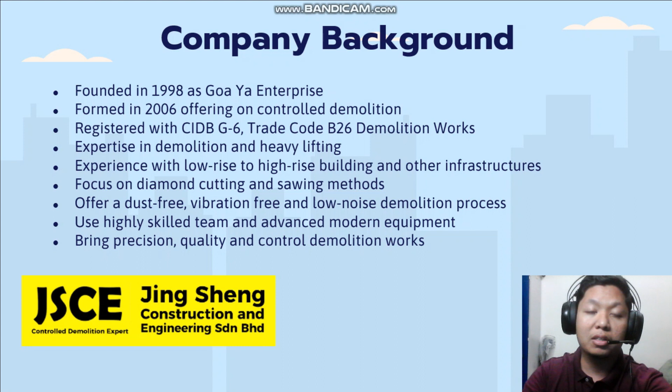Jing Sheng Construction and Engineering is a demolition company and heavy lifting specialist contractor with experience ranging from low rise to high rise, residential to industrial, and building to infrastructure. They offer controlled demolition services to the construction industry and related trades, with a focus on diamond cutting and sawing methods that provide a dust-free, vibration-free, and low noise demolition process. They use a highly skilled team and the most advanced modern equipment to bring precision, quality, and control to highly productive controlled demolition works. Jing Sheng Construction Sdn Berhad is located in Kuala Lumpur.

Hello, my name is Muhammad Haziq bin Abdul Muti, and I will explain the introduction and project background. Demolition is destroying or removing any load-bearing structural component of a building, including houses, shops, offices, and other buildings in the world. For our project, we are collaborating with Jing Sheng Construction and Engineering Sdn Berhad. This company has done many demolition projects, and the project that we chose is the demolition of the multi-level car park at Hentian Putra PWTC. This project is a total demolition project. The site that has been cleared will be used for a new building.

The demolition method for our project is the top down method, which demolishes one floor at a time. The roof will be demolished first, and then a section of each floor is removed to allow the debris to fall through. So basically the top down method is demolition from the top floor down to the ground floor.

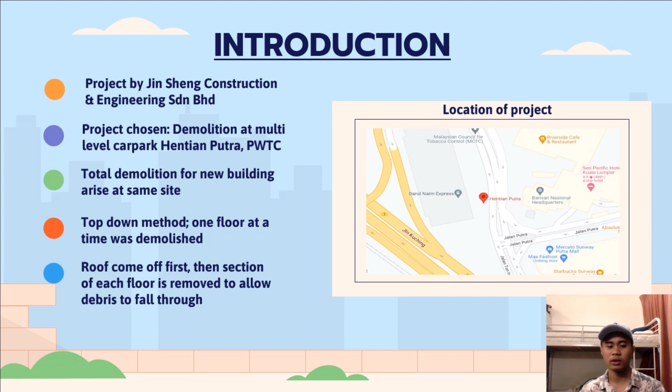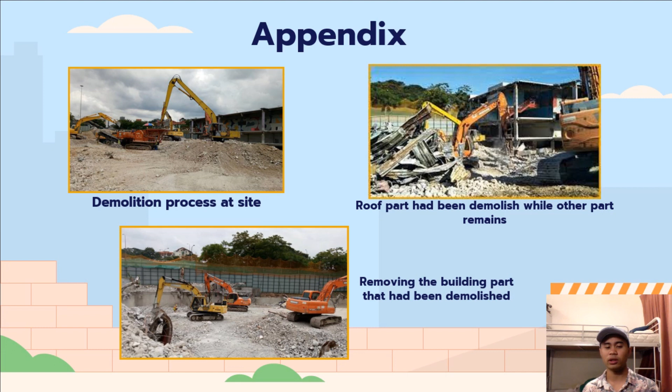Assalamualaikum and good day. My name is Aisyah binti Tesobing and I will explain the review on the project demolition work. The first process is the pre-demolition process. In this process there is building surveying, which determines the type of materials used for construction. It is essential as it helps to determine the method of demolition. The presence of hazardous materials is also checked as it can cause failure of the demolition process.

The next process is the removal of hazardous material. The results of a demolition survey revealed hazardous material including asbestos. Before the demolition, specialized asbestos removal and clean-up companies are hired to clear the site of the hazardous material. The next process is the demolition plan: before the demolition work starts, it is important to illustrate the process involved so that it will go smoothly. The location of the building has to be checked, and the distance from adjacent buildings, roads, structures or schools.

And lastly is the stability report. In the stability report, there are a few components that must be included: a report on the stability of the structure that is going to be demolished, structural calculations for temporary supports and bracing when powered mechanical plant or equipment is utilized, and an assessment of the stability of nearby structures and adjacent properties.

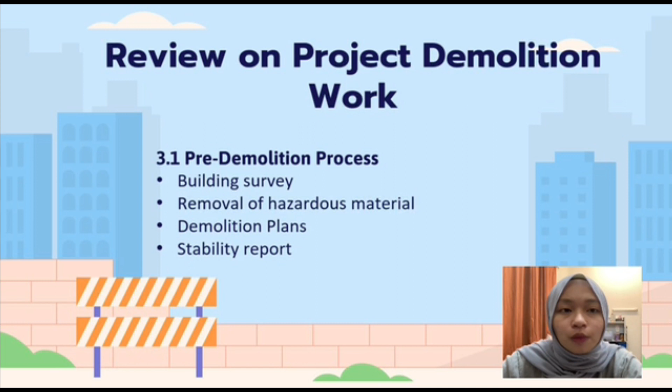The next part is the actual demolition process, which is the top-down method. As the working space is limited, the top-down demolition method is used to demolish the low-rise car park. Only one floor at a time is demolished using this method. Once the building had been brought down to first floor height using this procedure, a structural investigation was done to determine the best way to proceed. All of this was accomplished while keeping the live access road that runs right underneath the structure open. The structure was placed near the entrance to a building situated behind the site.

It was necessary to keep this gate open during the demolition process. So this was accomplished by creating a specific entry and exit for the office building, guarding it with debris fence built into the scaffolding and having a full-time police traffic to watch the entrance.

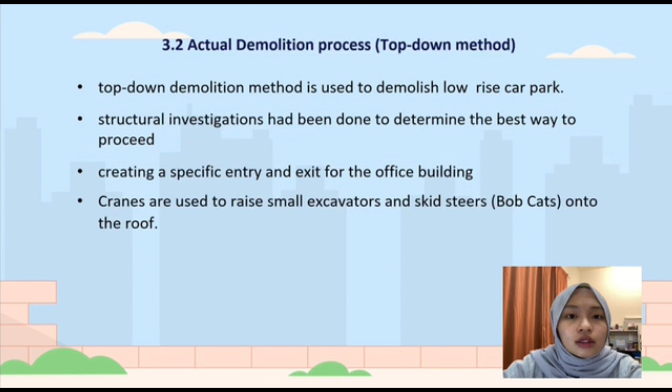Cranes are used to raise a small excavator and skid steer, which is the bobcat, onto the roof. The bobcat was used to gradually dump all of the debris produced during the demolition down the lift shaft. So the arisings would then be stockpiled for crushing after being cleared by a second bobcat positioned on the ground floor. So ramp building is possible due to the roof openings. The excavator can descend onto the ground below.

So the roof will next be removed by the excavators under carefully monitored conditions while they work from below and above. The same procedure is repeated for each floor after that. A portion of each floor is removed to allow the debris to fall through. So guardrails are erected around apertures because while the demolition project is ongoing, the debris may be dropped down the lift shaft. So this method is used as it is commonly used and designed, simple and cost effective. In addition, with careful design and planning, it is considered the safest way to demolish the building.

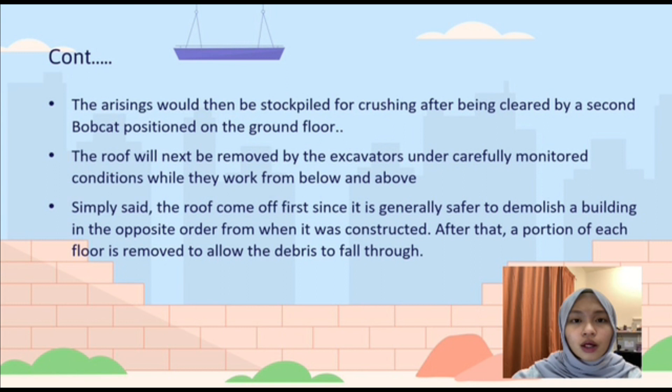The last part is the post-demolition. So in this process, the last thing to do is site clearance. It involves leaving the location secure and safe. The site drainage system is thoroughly cleaned and tested to ensure that it continues to function, and any pits, sumps, trenches or voids must be left filled and securely covered. Moreover, all contaminants are left or removed in a way that poses no risk to health or the environment.

Finally, the planning supervisor should make sure that the health and safety file has been assembled and given to the client after the work is finished.

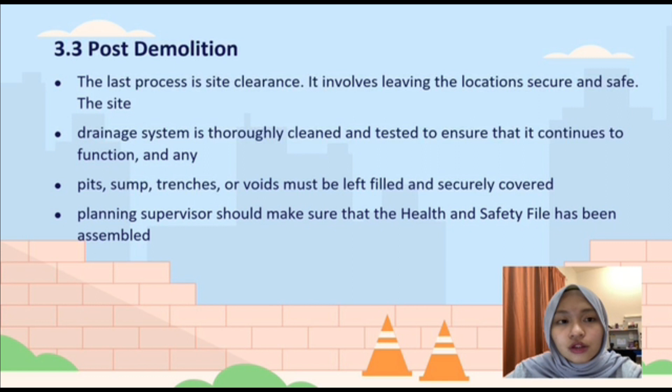Thank you. Assalamualaikum. My name is Muhammad Amri bin Azmi, and I'm going to continue the presentation with the discussion on disadvantages and advantages of the safety method applied in the demolition work.

For the advantages, there are six of them. So the first one is the process of the top-down method is very systematic and detailed. Worker safety also can be controlled. And next, usually the surroundings of the demolished site will be cleared before the next demolition happens. So hazardous materials can be eliminated to ensure the safety of the site, such as trees or maybe a rock. So third, the less use of plant and machinery helps to reduce the risk on site. More machinery use needs safety measures for the safety aspect, and only professional workers should handle it.

It provides a stiff support system for the wall, minimizing movement, so less movement reduces the risk of collapse of the building onto the workers. And the virtually vibration-free operation minimizes the potential for ground movement and resulting detrimental settlement. Lastly, it requires less space for the construction area, reducing environmental pollution associated with pre-construction earthworks. Worker health and safety are secure with no exposure to massive pollution.

So for the disadvantages, there are four of them. The first one, the restriction on the size of the plant and limited access. Proper walkway plans are needed. It is surely needed for the small type of building. And second, holes may have been left in the slabs to provide access for the subsequent excavation, and the worker has to be aware of the surroundings. The third is the stiffer construction during the intermediate construction stages attracts higher loads to the permanent structure. And lastly, the potential water leakage at the joints, caused by poor maintenance of pipes.

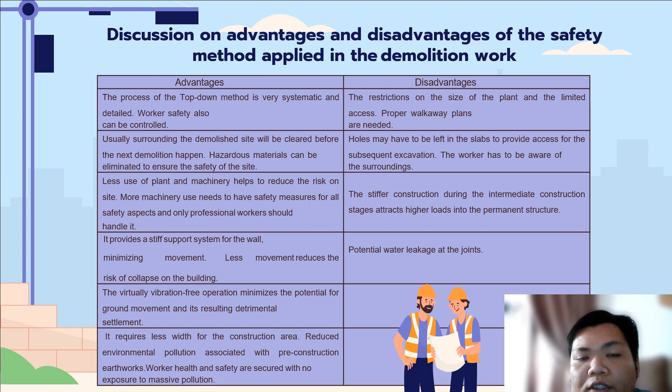Assalamualaikum, it's me again, Ahmed Syamil bin Kamaruzaman. So I will present the conclusion. So in conclusion of this project, planning a demolition work process is one of the important parts of the project. Before the demolition work process begins, the first step that must be taken is a careful survey of the building, which is to prevent any accident such as damage to the environment, to the public, and also the adjacent properties around the area of the building to be demolished.

So the method for the demolition process of the building depends on a few factors such as condition of the site, type of building structure, height of the building, and also the age of the building and the economy. The location of the building is also one of the factors regarding the method. So controlled demolition is required in every process to ensure the safety of the workers and surrounding environment around the building and to prevent injuries and accidents.

So the demolition procedure and process should be carried out with the goal of decreasing the risk of causing damage to humans and properties of the public, endangering the health and safety of the site personnel and negatively impacting the neighborhood environment.